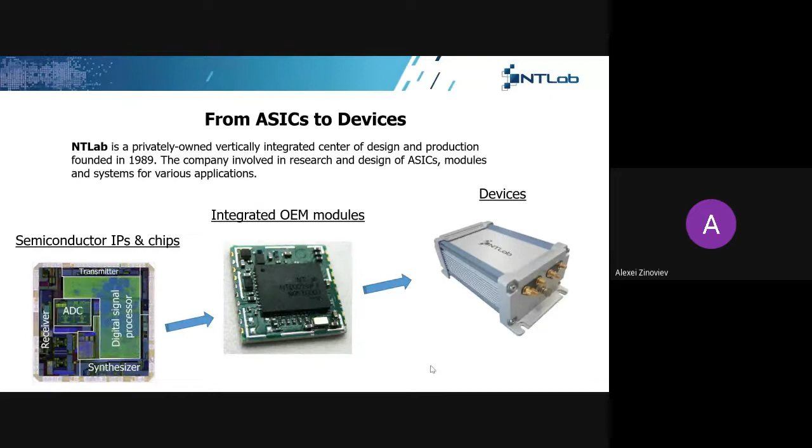NTLab, first of all, I would provide some facts about the history of my company. NTLab is a privately owned, vertically integrated center of design and production, founded in 1989. We produce ASICs, modules, and systems for various applications, and also IP components and chips related to GNSS applications.

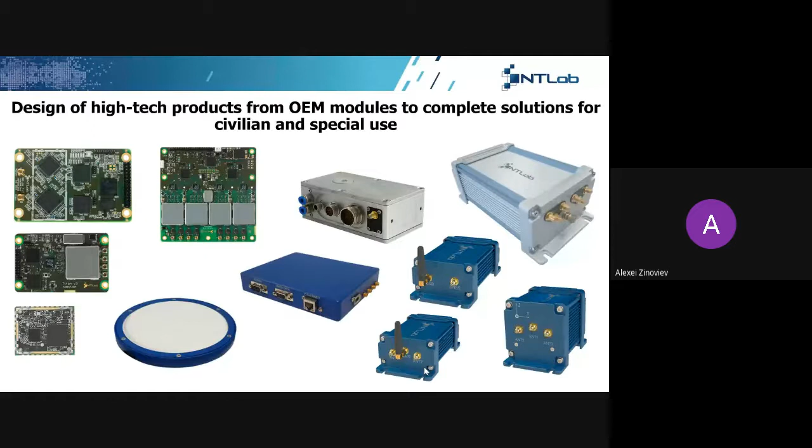This slide includes a photo of some of our products. These are OEM boards, integrated devices that include inertial sensors inside. Also, here the receiver that can play a role of the reference station is presented. It is an assembled device that includes a GNSS board inside, which is capable of tracking all current GNSS signals.

Also, it is our intention to propose co-development, licensing, and joint manufacturing in accordance with the Make in India concept. We are looking for cooperation, and we offer navigation equipment for high precision multi-system, multi-band GNSS receivers with PPP and RTK capabilities. So we are focused on high precision GNSS applications.

Also, it is very important for us to establish good contacts with universities in India. We cooperate with University of Burdwan, Jain, Marwadi, and the National Institute of Technology.

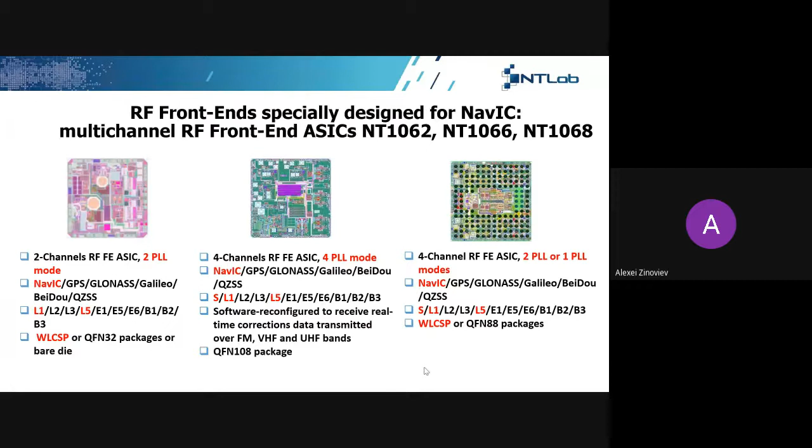In order to compute position, it is required to process samples which are generated by these RF frontends. So it is a transformation from analog to digital signals.

Also, this is our digital signal processing chip, which is capable of supporting many GNSS systems and signals. This 1058 chip is capable of supporting NavIC, GPS, GLONASS, Galileo, Beidou satellite systems with various frequency bands.

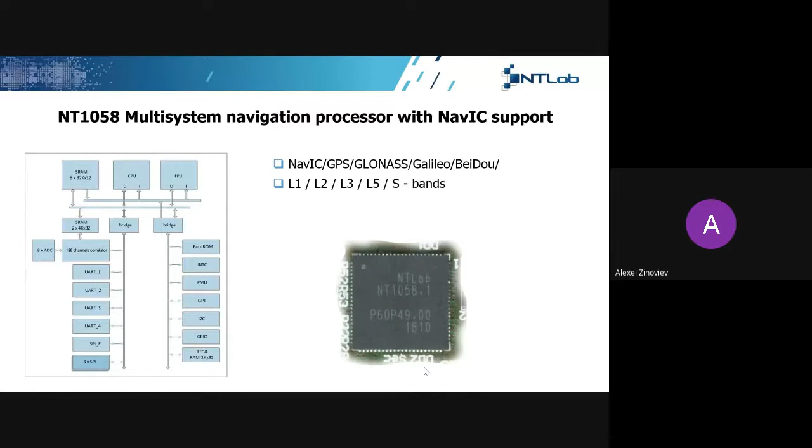This is general information about our OEM GNSS boards. All of them are multi-constellation. We are focused on supporting all available GNSS signals and systems currently available. We support multi-frequency bands, and it is quite important that we support the NavIC S-band signal in full, along with the rest of other GNSS signals.

We implement positioning modes such as usual standalone, and also support RTK and PPP modes for high accurate positioning. Measurement precision is at the best level in the class of GNSS equipment. In other words, we perform at the geodetic level of accuracy in terms of measurement precision.

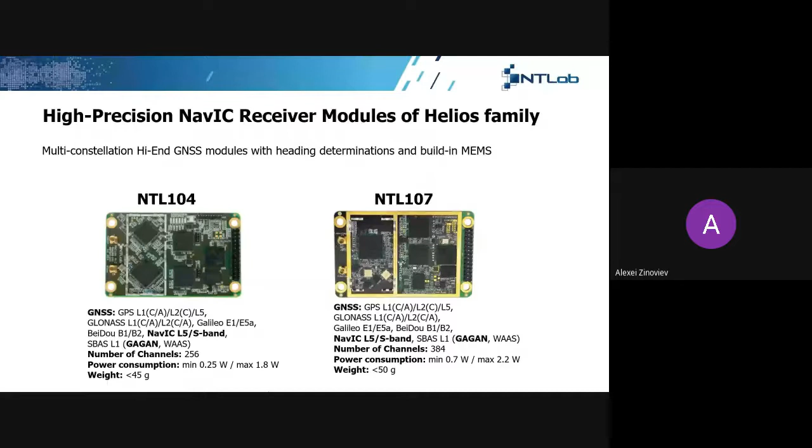It supports GPS, GLONASS multi-system, multi-frequency set of signals and systems. It contains 384 channels, and power consumption is about 2 watts.

It's important to note that we support the concept of open architecture. It means that it is feasible to upload user software into our modules, software which may be developed specifically for the given application. It is possible to get access to the raw measurements and use them for anything, including the user's own algorithms for high accurate positioning such as RTK, PPP, for example.

It can be considered as a platform which could be used for development of users' own applications and products, and we just provide a means for doing this task.

We support application programming interface with the Helios family. It includes FreeRTOS operating system, with a usual set of methods for communication between different tasks, such as semaphores, mutexes, queues, and similar tools. Also, we support CAN interface, USB, and others, as well as MCU access to initial measurements.

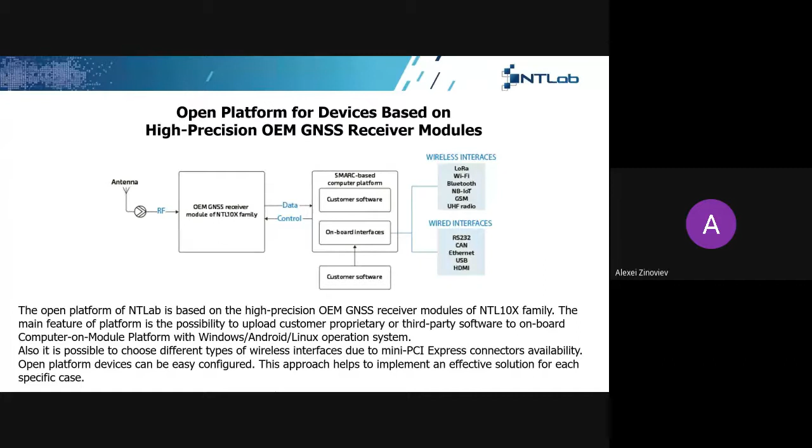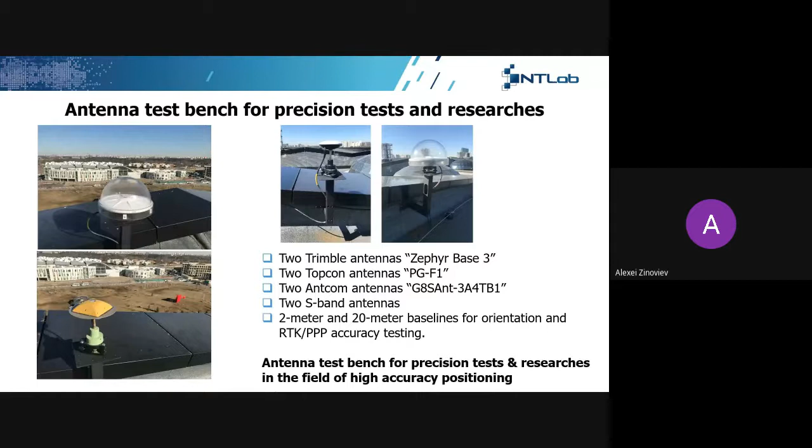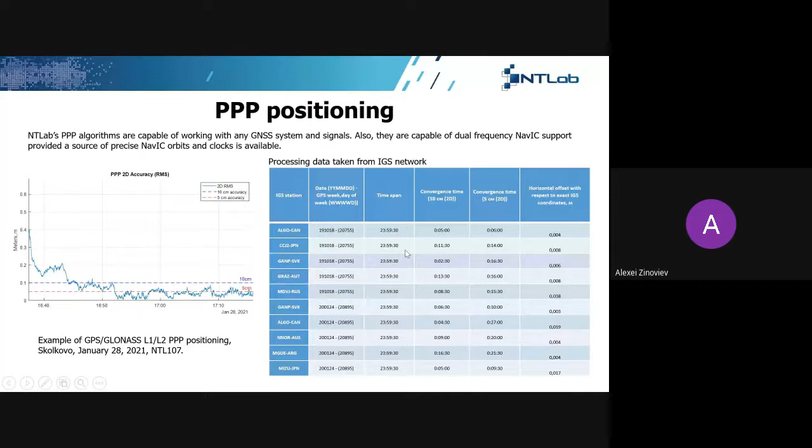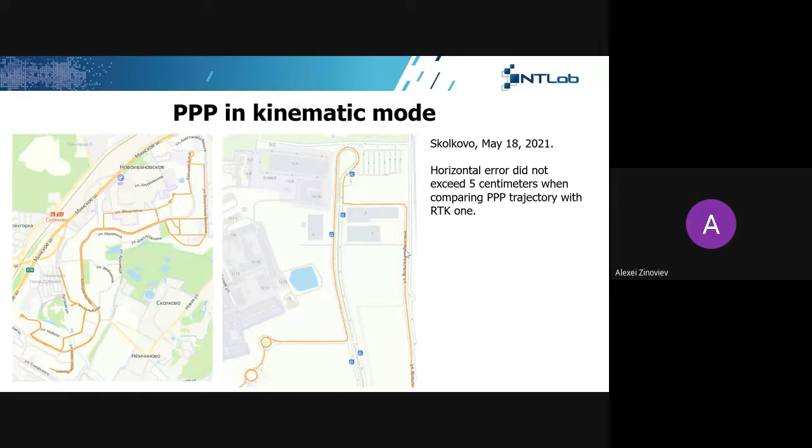So I will conclude with a summary. NTLab is a design center that provides development at any technical level, from IP components to assembled devices, in cooperation with partners. It's important to note that no black boxes are included; all key components of our devices are developed in NTLab.

NTLab GNSS receivers support NavIC L5 and S-band signal tracking in full, and raw measurements are ready for further processing. We have developed RTK and PPP algorithms which are implemented into our rover receivers, and they already support NavIC-only RTK positioning.

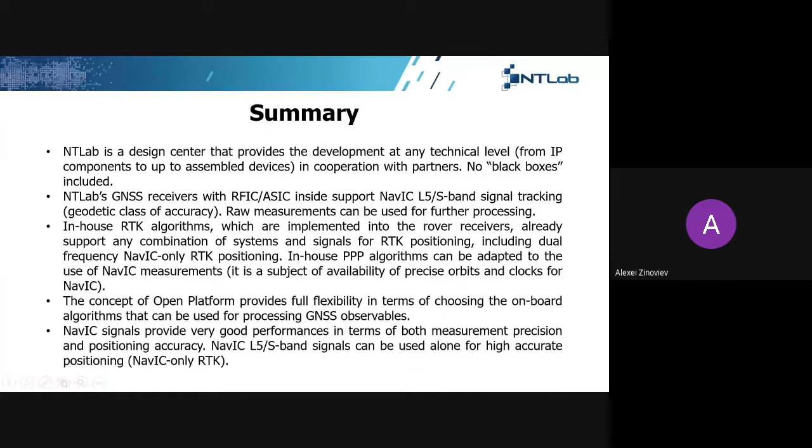In-house PPP algorithms can be adapted to use NavIC measurements. The concept of an open platform provides full flexibility in terms of choosing the onboard algorithms used for processing GNSS observables. NavIC signals provide very good performance in terms of both measurement precision and positioning accuracy. NavIC L5 and S-band signals can be used alone for high accurate positioning, for example, NavIC-only RTK.

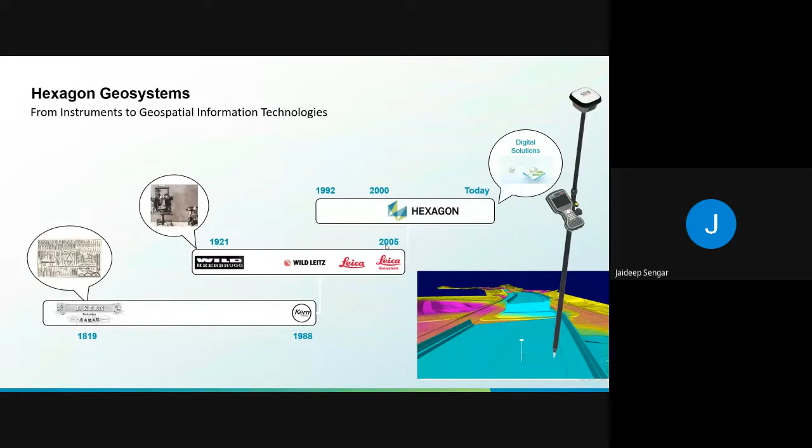Now we are coming to digital solutions. Everything you can put on your laptop or smart tablet, and you can go to the field and generate drawings, data, everything you can do on the field itself. So today I am going to present a solution on GNSS.

In GNSS we have many things to show you; out of that, I will try to capture a few things for you. The journey for GNSS in this organization started in 1984, with the first GPS receiver that could track GPS signals. The time for centimeter positioning took somewhere from 4 hours to 12 hours. The journey starts from here, and right now we are taking less than 4 seconds to give you a position.

Starting from the heavy system, which was very bulky, giving you the data, we moved into a sensor where we measured the data within an hour, and then down to minutes for centimeter level data. Then we developed new technology where we could track GPS and GLONASS signals, right? Then we developed technology in 2016 and came up with a sensor which can track multiple frequencies as well as the multiple constellations currently available.

For example, GPS L1, L2, L5, and GLONASS, Galileo, BeiDou. And right now we are also able to track NavIC signals. Then the company came up with a new sensor called the true tilt sensor. It is the first tilt sensor which is calibration-free and immune to magnetic disturbance.

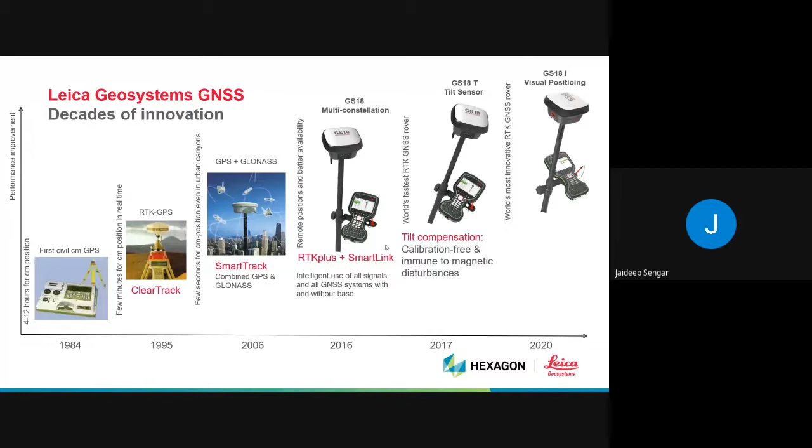Last year we released a new sensor called GS18 I. We put a camera into the sensor so that you can capture images on the field, and later on from the images you can derive the point cloud for better understanding.

Let me explain the technology we are doing right now. We are giving a future-proof GNSS technology. Right now you can measure GPS, GLONASS, Galileo, BeiDou. Apart from that, for example, HAS signal for Galileo E6 is not yet available for civilian use, but our system is ready and compatible for the E6 signal. So once the signal is available in 2023, you won't need to replace the complete hardware. You just need to put a key, an authentication key, to track the E6 signal. That's it. So we call this future-proof GNSS technology.

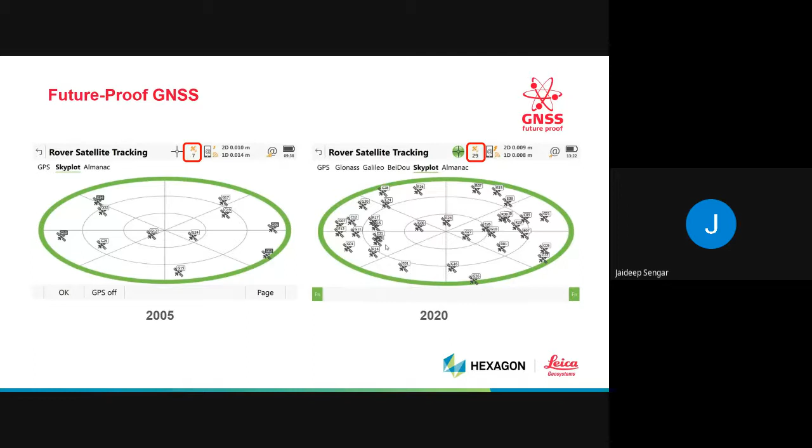Then we came up with a technology called smart check. When you go for a survey on the field, it is very important to understand whether the data you are getting is accurate or not. Because when we say we can deliver 8 plus 1 ppm accuracy, we maintain a double check on that accuracy, so that whatever we claim as a company, our customers actually get that data.

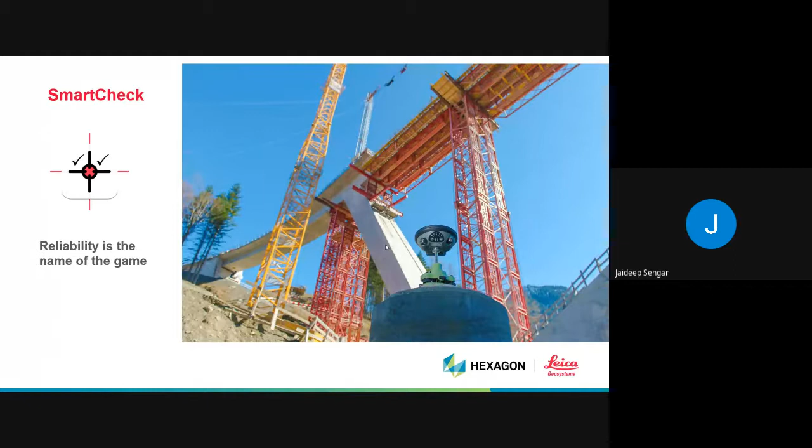Then we came up with a solution called smart link. In case you don't have internet connectivity for network correction services, or you cannot establish radio correction services, but you still need centimeter level position on the ground without any base station - because it could be too far, or it's not easy to establish a base or ground station - you can go with the smart link services, delivered by satellite, similar to Gagan. These correction parameters come from a satellite, and are processed by the sensor and software to give you centimeter level data without any base station.

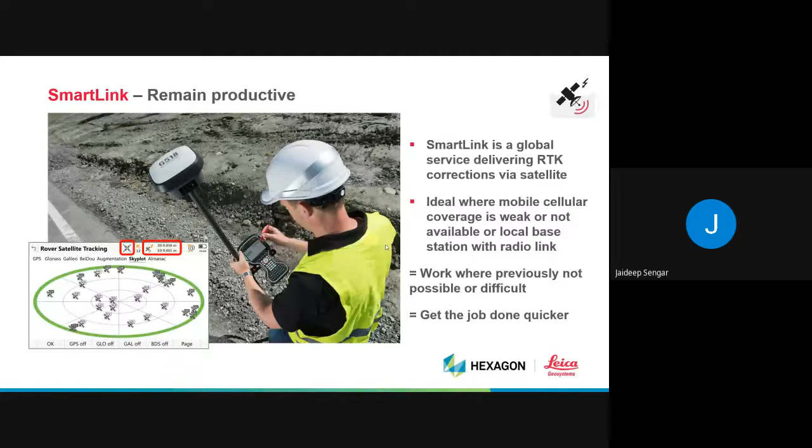Now let's look at a small video about the tilt sensor. Earlier, you needed to level the pole, then take a measurement, which was a really time-consuming exercise. With the tilt sensor, you don't need to level the pole and can continue your survey. How do we do it? We use an IMU, an inertial measurement unit, to get information about the direction and angle of the pole, which can deliver 0.01 second angular accuracy, and it is very fast - it can measure data in as little as 0.5 seconds.

Whenever you move your steps, it understands where you are moving, and it takes the data, applies the correction, and gives you the same reading you would get from a vertical pole. It is a patented technology by Leica, calibration free, immune to magnetic disturbance, and delivers the most reliable results on your screen.

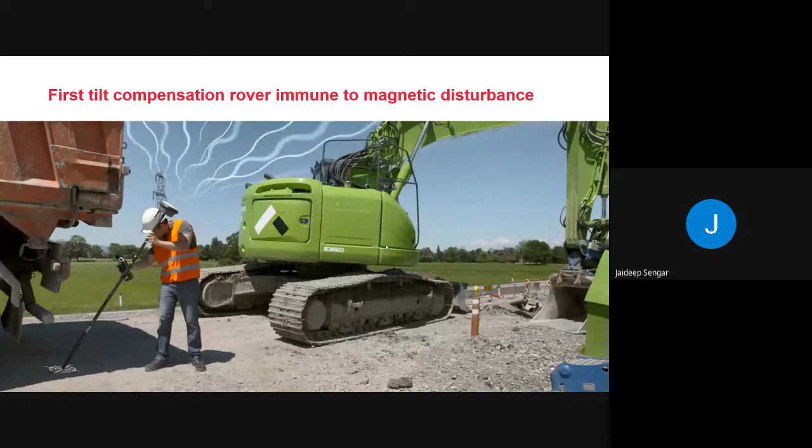The most important part of this sensor is that it can work anywhere, no matter if you are in heavy construction industry, building work, or normal topographical survey - anywhere you can go with the sensor and collect data as per your desire.

I have shown you that there's a normal sensor which can track GPS, GLONASS, Galileo, BeiDou - that's one part. Then the next sensor gives you an important feature: you do not need to level the pole, but you still get the same accuracy. So what's next? That is important.

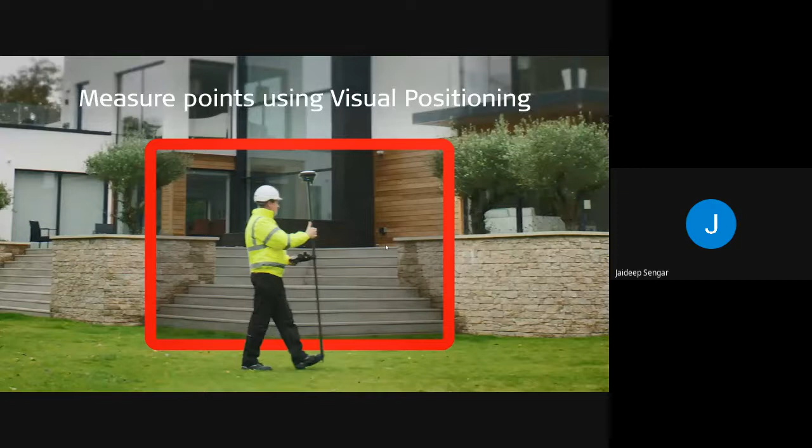The next thing is imaging. Imaging means if I'm not able to reach an area, I still have to capture it - how could I get data for that area? A camera is built into the sensor, the same GS18 sensor. Once you walk, you capture the data, and from that data you can collect the points where you want. It is safe, and you measure the data from a distance. Sometimes people don't allow you to enter premises, so this way you can mark the point and still get the data.

So how are we doing it? It's important to understand. We are doing it using a GNSS sensor, which gives you clear important parameters of the GNSS. Then we have a tilt sensor, which tells you where you are moving it, and the camera, which is capturing the image. All three are processed on a single platform and give good results and output for you.

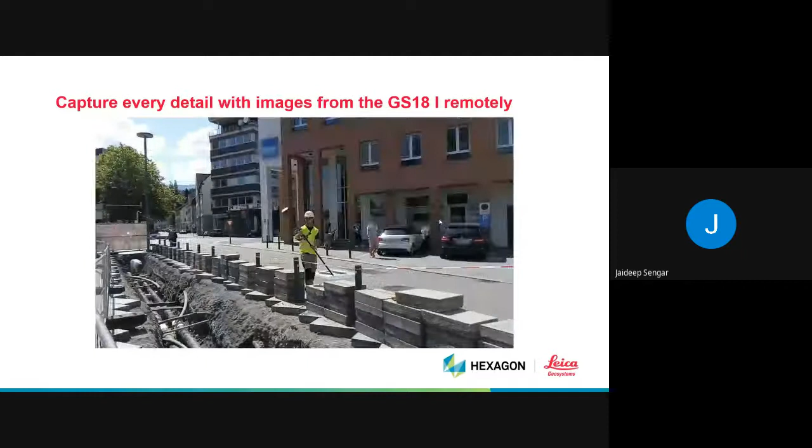So for another example, this is a pipeline, and it is important to track all the information of the pipe laid down in the area. Earlier, what happened? You had to go inside and take the data. That is a risky challenge, and some mishap can occur during the survey. So now with GS18 I, just from a safe distance, you measure all the information.

So right now you can go anywhere. A small video. This is a building, right? If I ask you to measure this coordinate of the building with a normal sensor, it is really tough. You would have to go with a scanner kind of thing and capture the details.

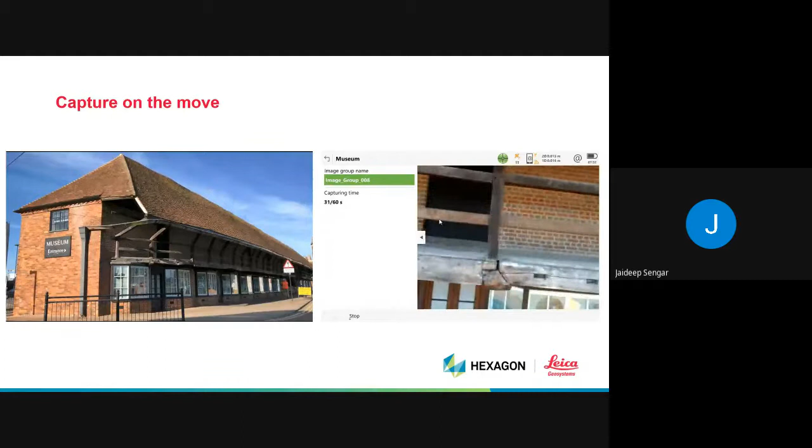But with GS18 I, a person needs to just walk. He's walking on the left side, and the data, whatever the camera is seeing, is on the right side. So from a safe distance, you walk along the building, and you can also see the capturing time. Up to 60 seconds of data you can capture and store into a group. These photographs will be captured into a group, and you can rename or give any name to the group, whatever you feel suitable. After working, once you think it's done, you press the stop button.

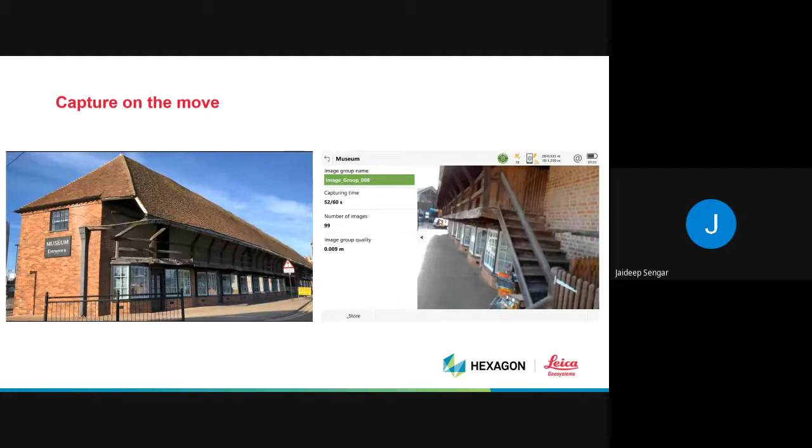Once you press the stop button, it starts merging the data. Once it merges all the images, 99 images have been merged into this group, and the average quality of the images is just 9 mm. So it's quite good accuracy on an image.

So after capturing the image, just open the image where you want to put the data, put the cursor and say measure. It is very simple to measure any point after capturing the data. This way you can mark the points on the image on the field itself.

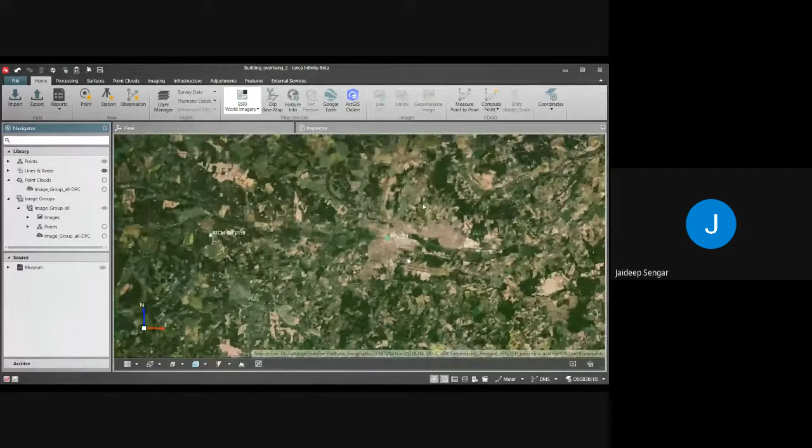Once you're done in the field, you can come back to your office. Maybe some data has been left, or your office person needs more data from the image. Import the data into software like Infinity. That is a powerful software which can handle GNSS data, TPS data, and as well as UAV data.

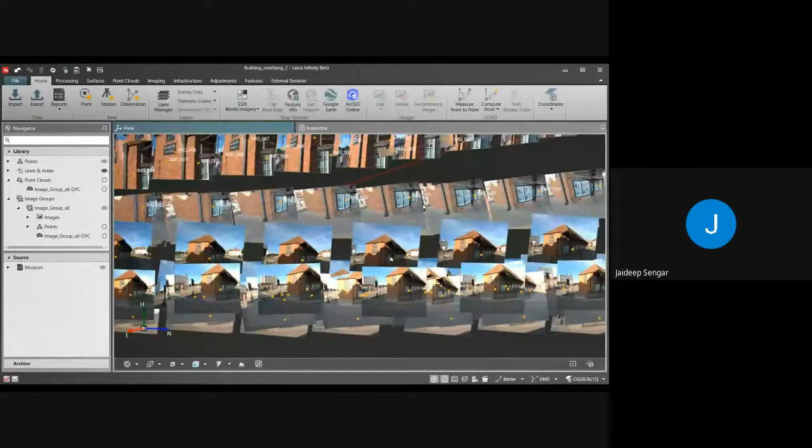So all the data can be put into a single platform, supported by OpenStreetMap and ESRI World Imagery, Google Earth. So it can tell you location information as well, where the data has been captured. If you zoom into the data more, it will tell you what kind of images have been captured and in which routine it was captured.

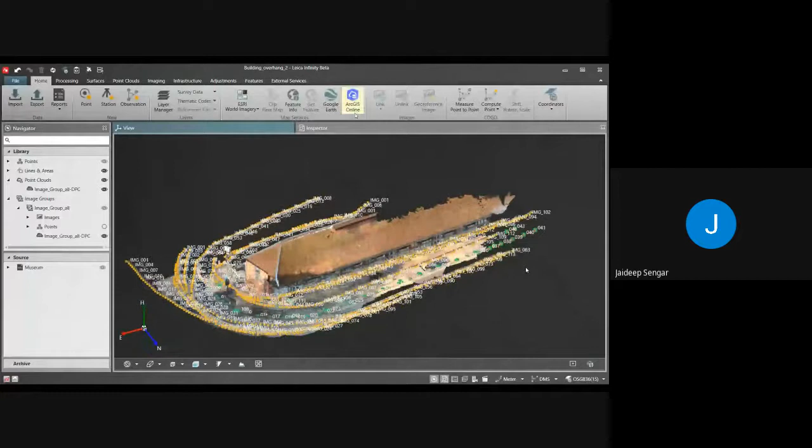So once you're satisfied with the import, you can click on the scan point option. It will generate the scan data of the image. You can turn on the images, and open just the scan. You can see it is a wonderful scan data from the images.

And now you can measure anything, whatever you wanted. You can even do redlining as well. And if you want to zoom into certain parts, you can do that.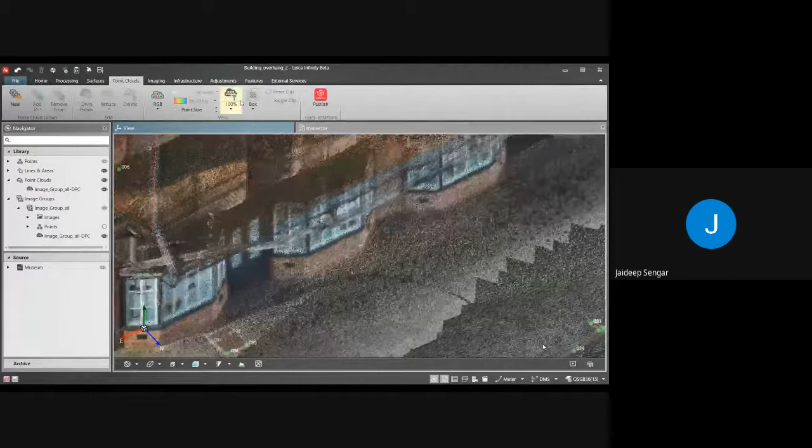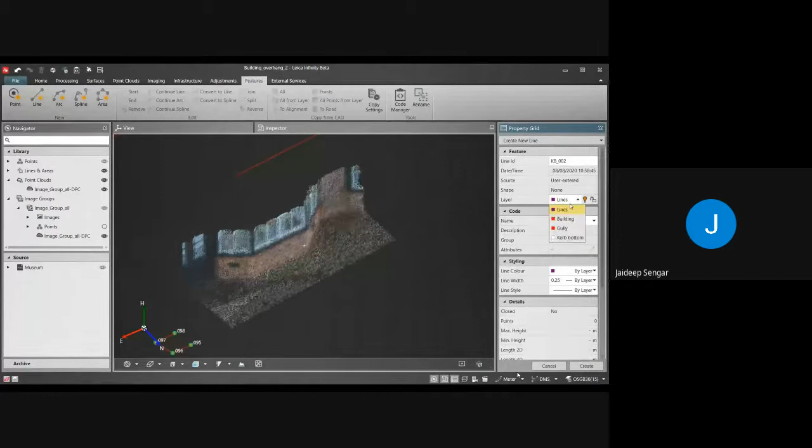So if I want to highlight some portion, I can create a box, and that portion will be highlighted for me. And because I want to do redlining or gather more information from this piece, I can highlight it and do redlining and marking of the building. Right now you can see, when I mark a building, it tells me the length of the line as well.

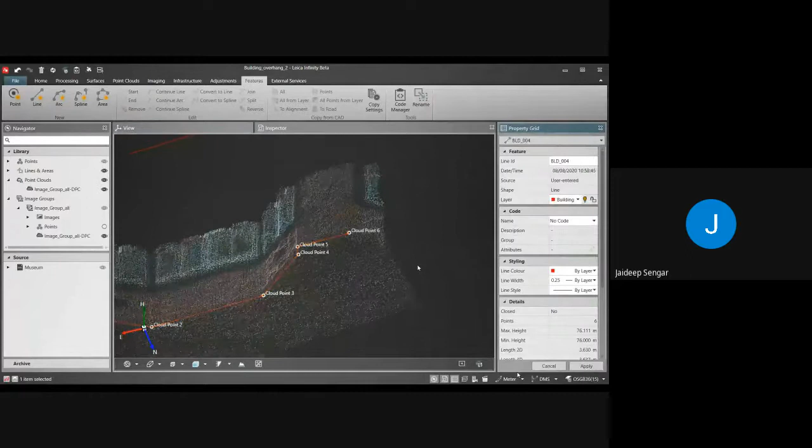That is one case where it could be a good support for municipal areas or those working in city areas, where people do not allow them to enter into premises.

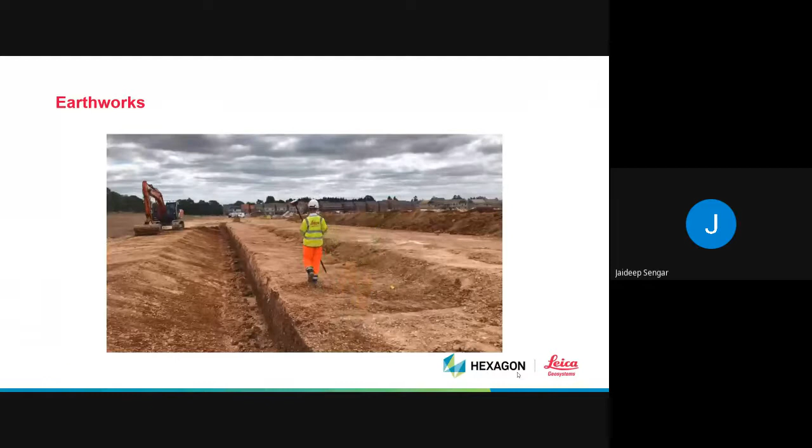This is another example for those working in construction areas. They drill something and want to create a mesh out of this area. Earlier, people would go to the total station or GNSS and capture the data every 1 meter, half meter, or 10 centimeters as per the requirement.

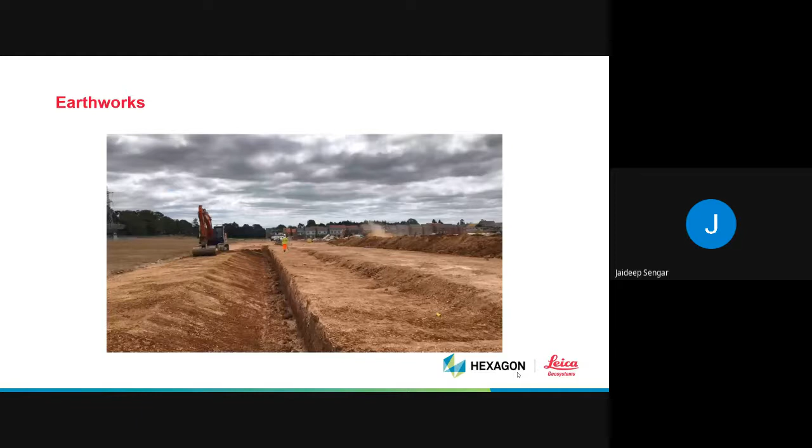But with GS18 you just move with the sensor, capture the details, put the data into software like Infinity, again the same software, and create scan data from the images.

Now we need to create a cross section or long section from the data. So we'll select the area where we want to create a cross section or long section, or if we want to do a calculation for the volume, we can do that too.

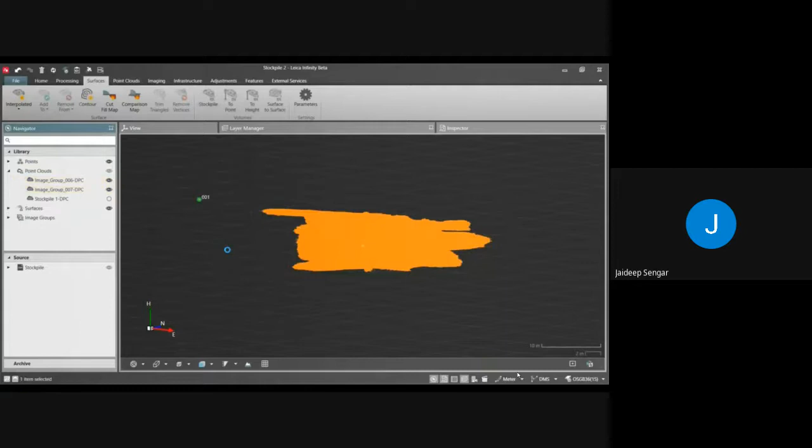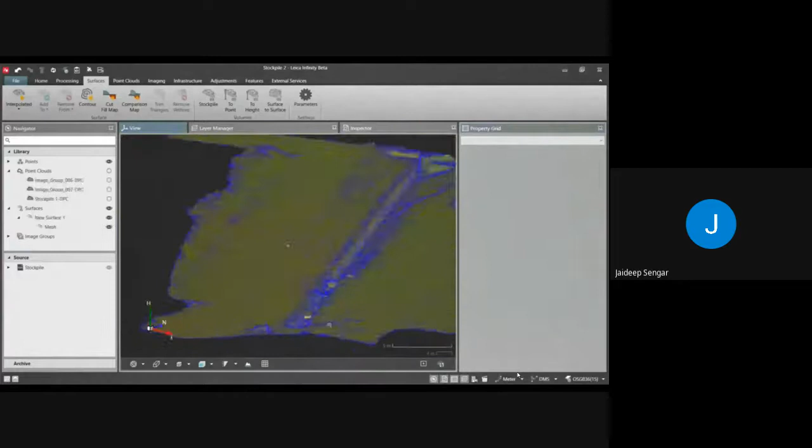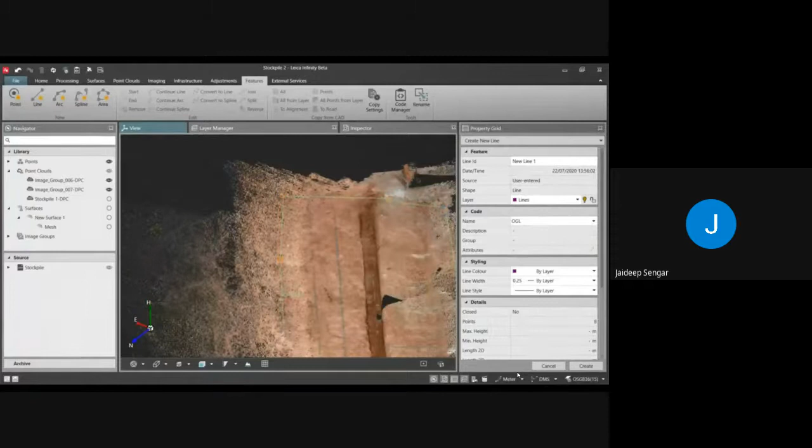Now we'll select the area. For that, I want to create cross sections. So only these points will be collected, and I can generate it.

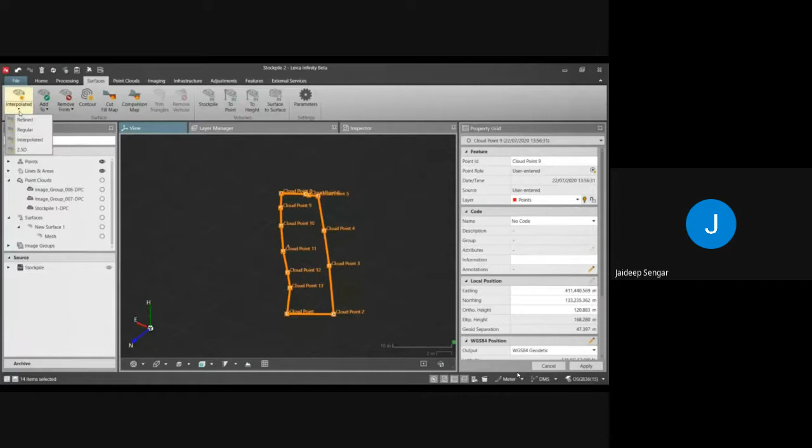Okay, so what are the advantages of having this kind of sensor? The first thing is that you are capturing 100 points in a minute rather than in hours. Earlier with GNSS, it took hours to capture 100 points, maybe sometimes a complete day. So you are saving time.

Second thing, you don't need to worry about the obstruction you are getting on the field, because you are getting the data from a safe distance. With this kind of sensor, the GS18 I, you can capture even difficult points as well. So it is a matter of safety for us. Then you can capture the scenes possible, right? So it will help you increase productivity.

So in summary, I must say GS18 I is a visual positioning technology we are offering, which is a fusion of GNSS, IMU, and the camera. It is very easy to use with survey grade accuracy. That is a very important point, that we are delivering survey grade accuracy with this kind of sensor as well. It has the same functionality that a GS18T sensor can do, plus our imaging capacity has been added to this sensor. We are offering a Captivate field software, which is a very nice software that can run on

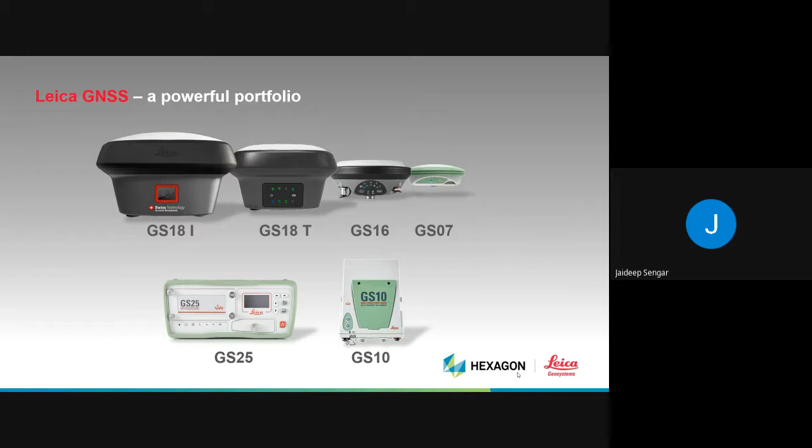To conclude, this GS18 I was the world's first GNSS smart antenna with visual positioning.

We say everybody knows the purpose is always good, but the shared purpose is always better, because both will be in a win-win situation. And that's done from my side. Thank you, sir.

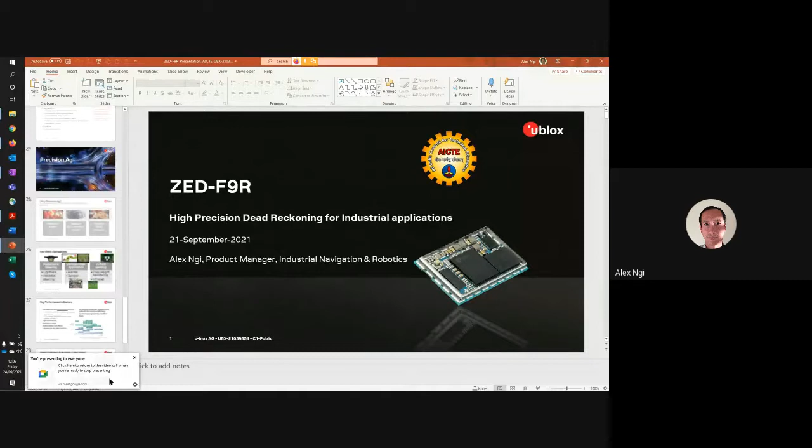Thank you for allowing us to present to you. My name is Alex Ngi. I'm the product manager for the ZED-F9R, and I represent u-blox. I think the message here for this product is that we're basically a company with a wide portfolio of modules and chips used in many applications, and we leverage the innovation of our customers to build high quality end products. We have very high quality devices often used in the automotive industry, and I think this is kind of an offshoot from there.

My presentation will not be so much about lots of performance figures and particular products. I just want to highlight two applications that may be of interest. I realize some of these are a little bit strange depending on which country you're from.

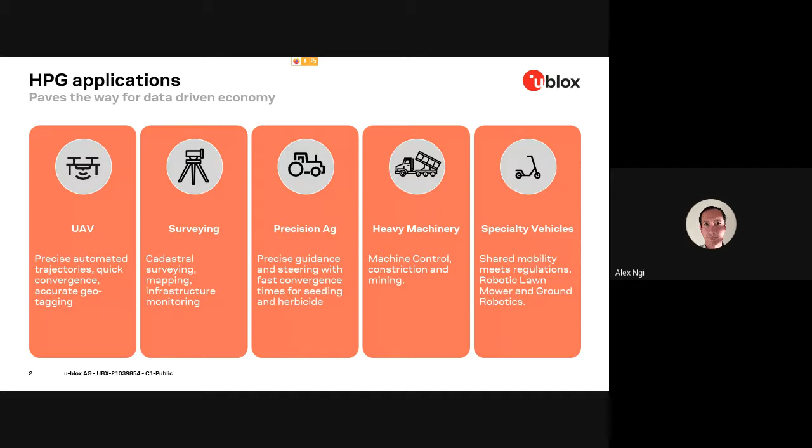From an HPG point of view, high precision GNSS, we see five different segments where we're used: drones, surveying, as our previous speaker has shown, which is also an important market segment. Then precision agriculture, which I'll talk about and how our product can help there. And of course heavy machinery for construction, and a number of specialty vehicles, which I'll also spend some time on.

The F9R product is a high precision sensor fusion product somewhat derived from the automotive side. I think the innovation that u-blox brings in this market segment is that we are targeting the higher volume markets. Compared to the previous generation of devices, we now operate with dual band receivers, operating in L1 and L2, and L5 in the coming devices.

The devices natively understand correction data directly in our modules. We have RTK algorithms implemented directly in the modules as well, and of course the 3D accelerometer and 3D gyroscopes. All this is merged with our sensor fusion algorithms to deliver the best position output for your applications.

We fine-tune our dynamic models depending on what kind of devices we're using. The latest additions have been scooters and lawnmowers, and we specifically validate our designs and fine-tune them for these applications.

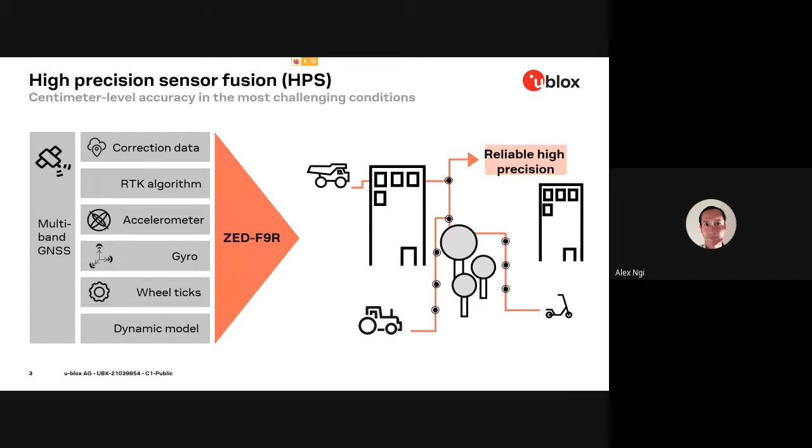The way we see our GNSS system, just as an overview, is that we focus on scalability of the solution. I'm looking for something that can operate with hundreds of thousands of units in the field and can be updated and receive corrections.

So we have this receiver that our system includes, the GNSS receiver, which has embedded RTK. We have it this way because we don't want the users or designers having to deal with the complexity—they should get the best solution from us. Our GNSS receivers are done so that the host implementations can be simple.

We maintain security, so when correction services are delivered to us, we're protecting the intellectual property of the correction service provider, and also ensuring you're getting a reliable and trusted source of corrections. We see correction services being delivered over the internet, some kind of cellular connectivity, or over satellite, and we provide the chips and modules for that as well.

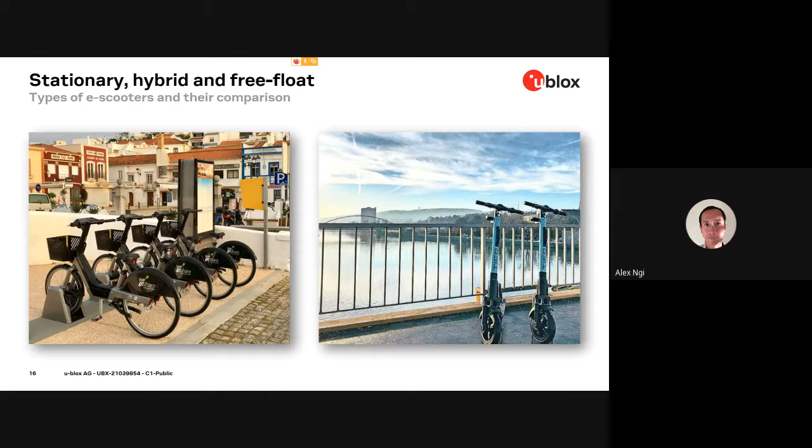You can basically park them based on city regulations, and I think that's where we try to help the operators improve their revenues. What we see is there have been lots of studies about how micromobility can work.

We view it as a very green and sustainable approach for transport, especially for the last mile. Post-COVID, we also see that more people would like to use such vehicles instead of getting onto a crowded bus. And we also see that a substantial portion of the business is on the maintenance of these and moving around these fleets, so there's opportunities for fleet managers.

So where we excel with an HPG product is that across the US, for example, in many states and cities, there are different regulations of what's allowed to use these things for. Some places want you to drive only on bike lanes, some tell you to drive on the sidewalk, some say on the road. All these regulations for a shared vehicle can be used to make it safer for everybody using such systems.

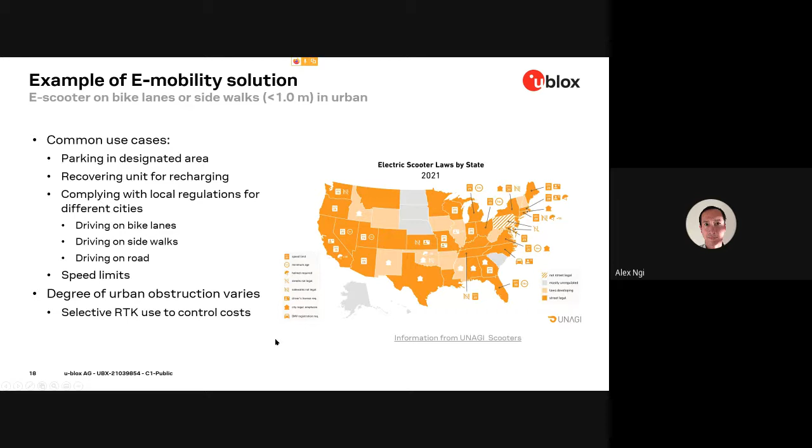A typical application we see is, here's some screenshots of Bird, who's a leading provider. On your phone, you'd get a map where the Bird scooters operate. And of course, when you're driving, you're not using the phone. So what happens is they have certain restrictions, used to enforce speed and parking policies and operations.

For example, in this small part of town in Zurich, you're only allowed to drive slowly, so the scooters are throttled to operate slowly. And in this park, you might not be able to park, but by having the maps in the system, you can drive full speed elsewhere. That's where the customer values the high accuracy of our dead reckoning solution, so they know where they are, how fast they can drive, and the system controls the user according to regulations.

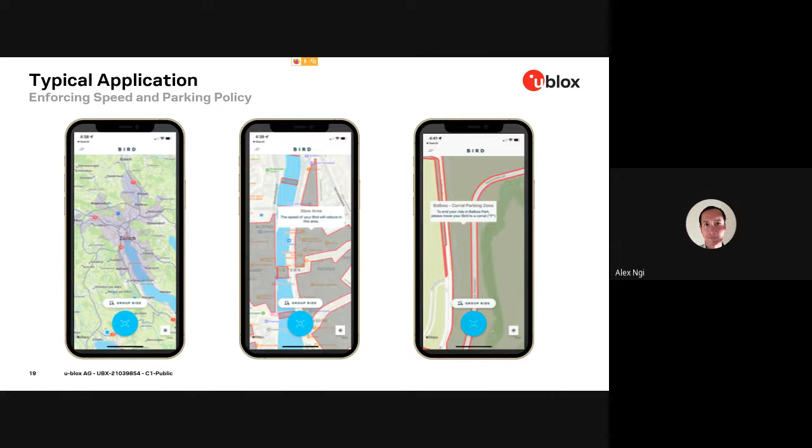So I'll show you a little bit about the accuracy here. The red is basically the F9R in scooter mode—those are the red points on the map. If you have bikes with a bike mode, which isn't what you need for a scooter, or if you don't have RTK, that's blue. So here you have three cases.

A fixed RTK solution is the best—here you can see the red is right on the dot. Then on this one, a more challenging environment with more buildings, there's a mix of fix and float solutions on the bike lane. Whereas if you don't have RTK, you're reporting positions outside the bike lanes.

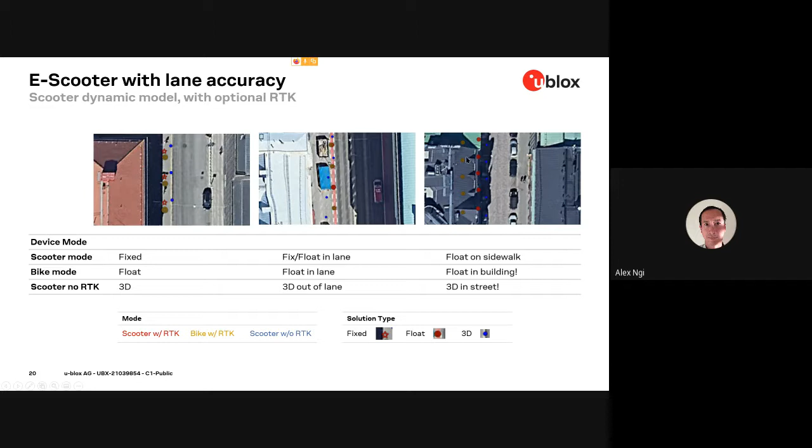So the way we help our customers, we even have a demonstration scooter that can be brought to different places so people can see how well it works. It's very simple—we have a GNSS receiver that hooks onto the hall sensors directly from the motor drive system. All we do is clean up the signal a little bit, and then use that as wheel tick. So it's very easy for customers to evaluate our product. Talk to our sales if you're interested in that type of business.

Finally, I'm not going to present anything new in terms of technology here. The main point for us is that there's a known market for precision agriculture. There are different applications where you have these very small robots moving and monitoring the fields. We all have an interest in maintaining sustainability for our planet in terms of how many seeds and pesticides we use, and there are lots of systems with assisted steering and light bars that people are building.

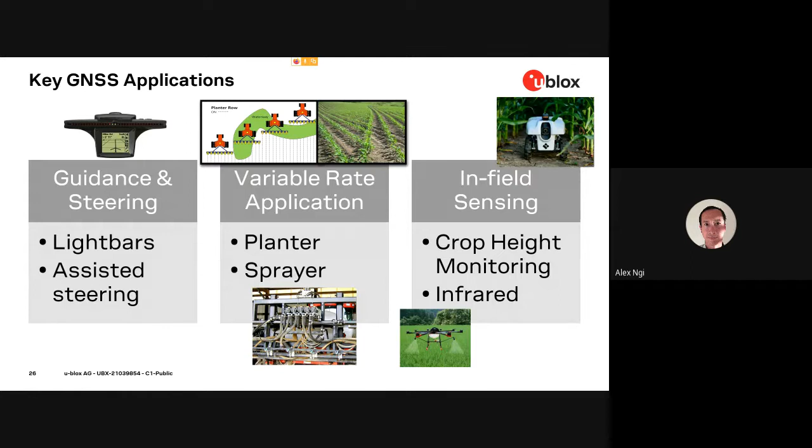I think u-blox is interesting for somebody that wants to build aftermarket products. We have a very cost competitive solution, and we see India as a large market. We've seen various reports that we need pass-to-pass accuracy of 10 to 30 centimeters with very high repeatability. This is from the GSA report on agricultural user needs, and I think our products fit very well here.

We see also that in India the farms are very small, and a lot of tractors are sold here. The very large tractors and combines being used in the US are not applicable to these small farms. So by u-blox providing a very cost competitive small product, I think there's a substantial market here for our dead reckoning technology to be used in the farms.

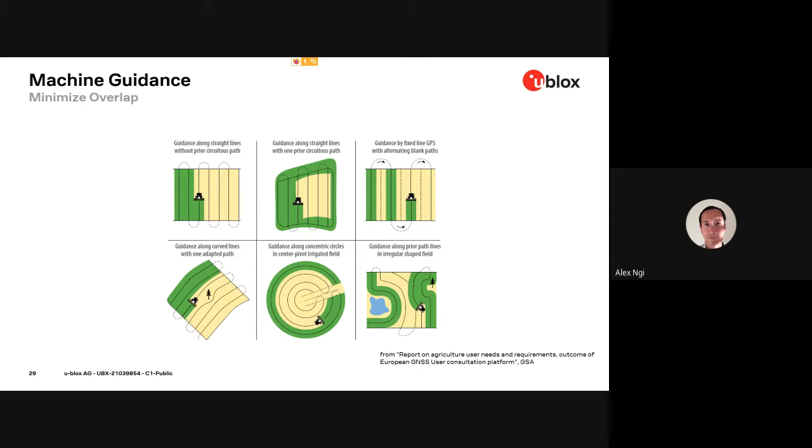When tractors drive around, you can have very little overlap and very efficient coverage of the farm field, and can reduce the overuse of pesticides and reduce the cost of seeds. It depends on the type of crops - if you have RTK technology, you can have very precise application of seeds, and you can select different correction services. Using a correction service based on PPP-RTK, which is our PointPerfect service, you can achieve that level of performance.

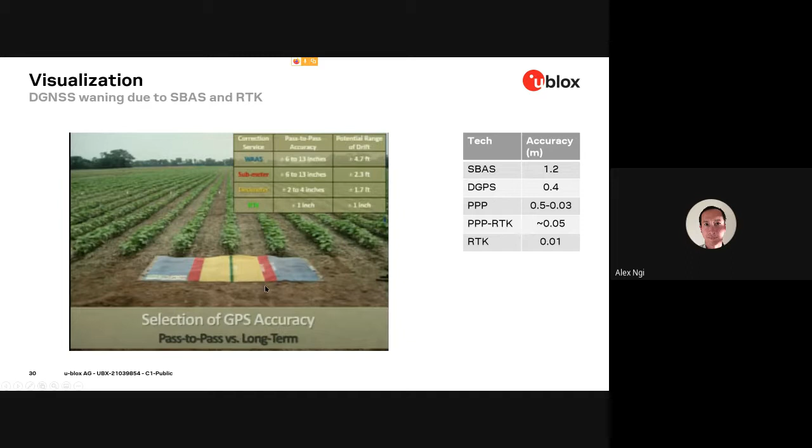In summary, the ZED-F9R is our high precision dead reckoning product. It's a multi-band GNSS receiver delivering centimeter level accuracy, a fully integrated solution for fast time to market. We have very specific dynamic models for slow moving service robots and delivery drones, and also for scooters. And we're compatible with SPARTN SSR correction services for easy and efficient implementation.

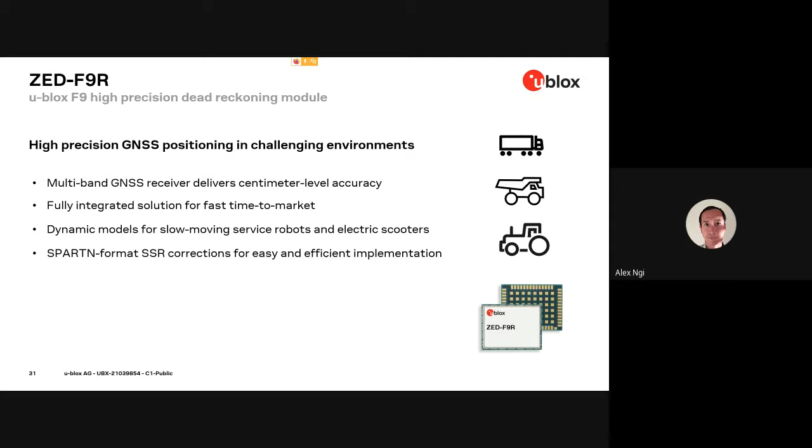Thank you very much for your time and attention. If you have any questions, you can contact Niaz Majid, and he would be happy to help you.

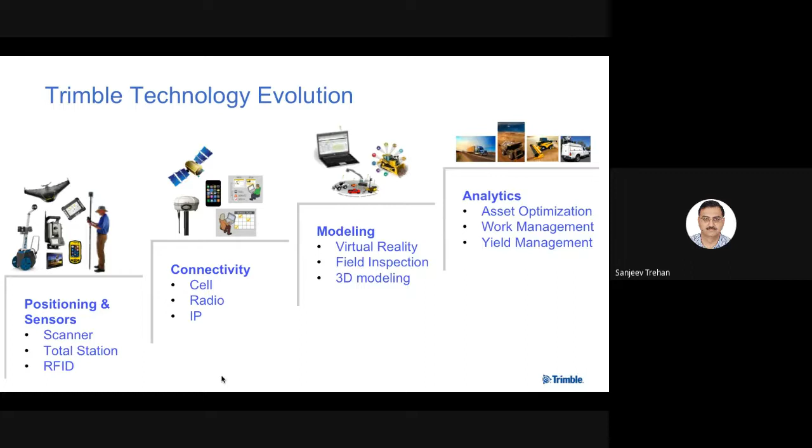Focusing on GNSS solutions, I would like to introduce some solutions that we have in the market being used in the country across different segments.

Today we're talking about miniaturization of technology. The only thing that restricts us from miniaturizing further is how much capability we can pack into a particular receiver or board. A lot of transformation has taken place over the years, and Trimble has been at the forefront of doing that.

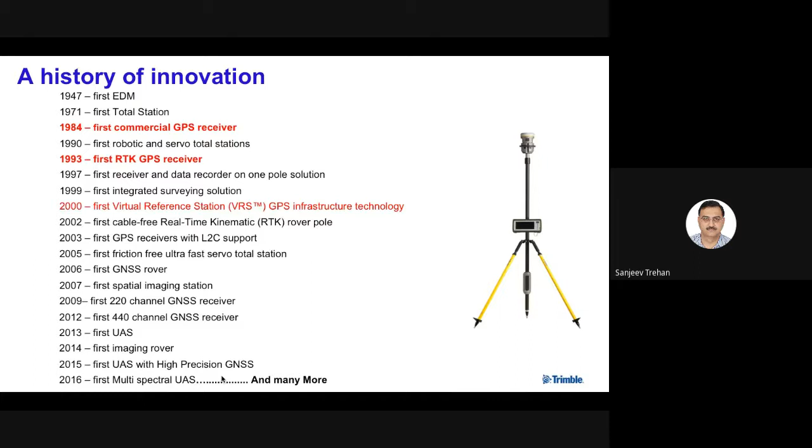There have been many firsts in terms of innovation. There's a very long history of innovation for those who are not aware of what Trimble has been doing. Apart from being among the first commercial receivers, the first RTK receiver was introduced by Trimble, and then the world changed after that. A lot of applications people use today, whether for cadastre, construction, or topographic survey, utilize RTK technology. Trimble also introduced virtual reference stations to the world, which I'll talk about a bit later. There are many firsts that Trimble is credited with, and they built the foundation for the GNSS industry worldwide, including in India.

Trimble Alloy is the backbone of a lot of geodetic programs in the country, whether it's the Earth Sciences project or CoRS networks being laid in the country. Trimble Alloy is in a very unique position as it was one of the first receivers to have complete support for L5 and S-band tracking, especially in the NavIC domain.

R8S and SP80 are workhorses. R8S is possibly the most used receiver in the country today. We have hundreds of these receivers being used by government organizations as well as private surveyors. In every corner of the country there are people utilizing these receivers, all packed with wonderful technology. I won't get into the specifics, but if there's any interest, I'll be happy to arrange an interaction with our team or personally share information with everyone.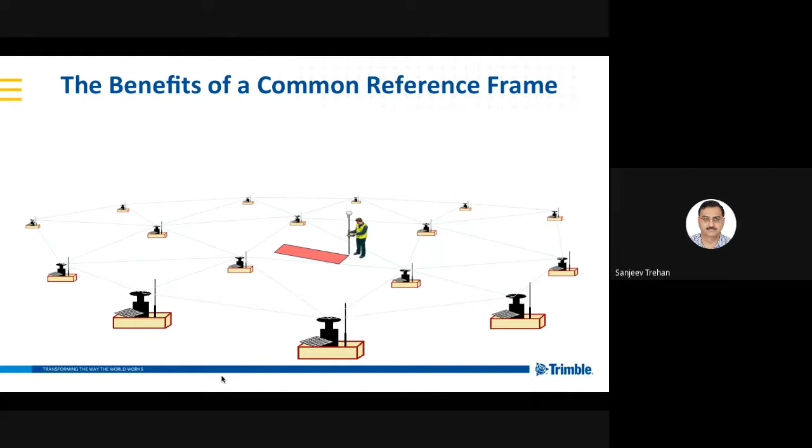Just in case people are interested in how it works: there's a network of receivers getting data into a centralized server, and the rover receiver, which has got permission, connects into the server. The server generates a position relative to a reference station next to it, and the user gets a corrected position as long as he's within the periphery of these stations. A very, very powerful tool, which is going to change the way we work.

Just to give you an example of what's been happening: we have set up a 73 CORS network in Uttar Pradesh, Uttarakhand. As I mentioned earlier, 126 are being installed in Haryana, Punjab, Rajasthan, Himachal, nearly completed. 90 are being set up in Madhya Pradesh, and we are also establishing a 60 CORS network for the high-speed rail network from Gujarat into Mumbai.

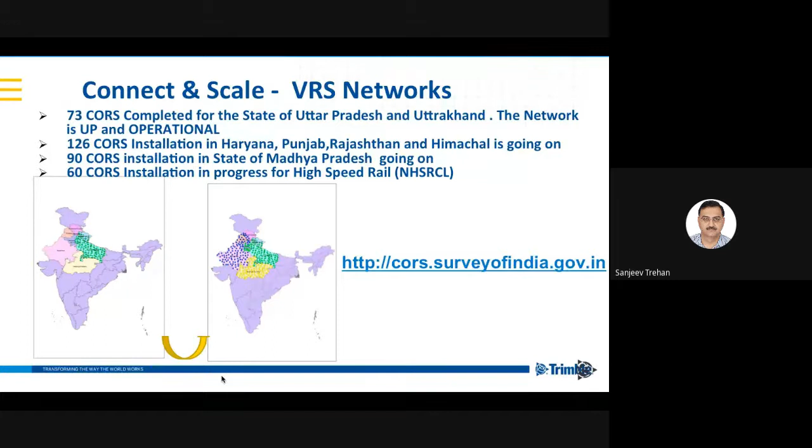Again, the predecessor for the Alloy is very much embedded out here. So for those of you who are not aware, Trimble has been a very, very rich contributor to the earthquake monitoring program in the country, as well as the tsunami warning program. If you get an opportunity, please go and take a look at the wonderful setup at IMD and Incois, where you can see real-time deformation taking place. This network has been used to predict whether a tsunami is going to occur or not, using various algorithms developed by these two facilities.

So a lot of work, a lot of effort has gone into creating the setup. A lot of customization was done for India for this project as well. So there are many possibilities that are there. If there's a problem area, it can be defined over a period of time, and a solution can be presented for those problems. As I mentioned, Alloy is the backbone.

A very, very quick look at what this series is about - a wonderful, rugged piece of equipment, extremely user-friendly, and we have hundreds of these working from the Himalayas, from the Northwest Himalayas, east to the plains of India, without any issue.

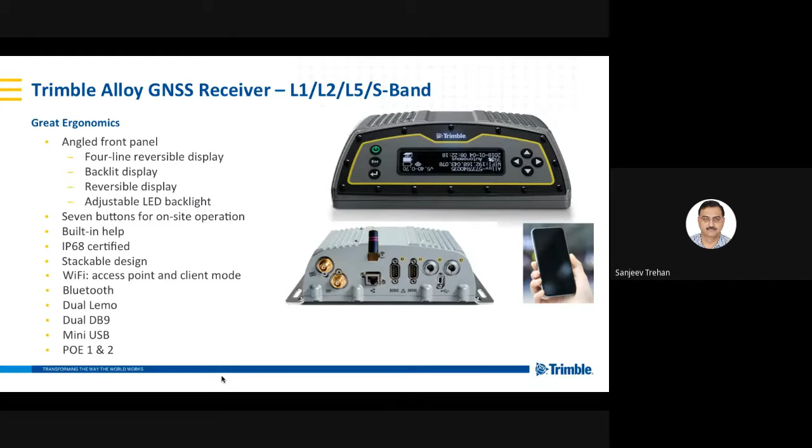We have a very robust portfolio of precision board and OEM solutions, which are getting embedded into various applications, whether it's autonomous vehicles, autonomous tractors, defense systems, or UAVs. A lot of these boards are finding their way into technology in the country and all across the world. So we have both box products, which can be retrofitted into various equipment or platforms, or board level products which can be integrated into a solution depending on the requirement.

All but two systems are L5 NavIC ready, so they support multi-constellation L1, L2, L5, and I can share more. There's a mix of both single antenna systems as well as dual antenna systems to take care of heading requirements. I can share additional information depending on who requires what, and it'll be my pleasure to do so.

I also help this particular side of the business in the region and support their activity with various customers around the country.

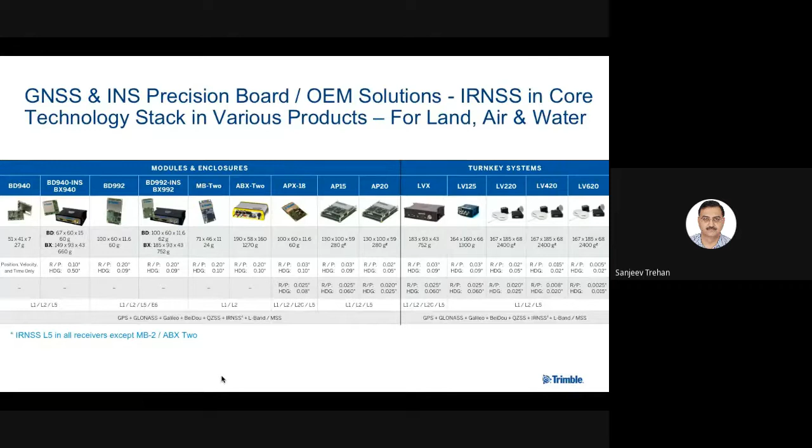Another part of this business is the Applanix solution. This is just an image of how the system looks, the box solution and the board level solution. Applanix has some core competencies, including marrying GPS and IMUs and calibrating them extremely finely. We have solutions under the Applanix brand operating in drones, mining environments, marine environments, along with UAVs, etc. Direct georeferencing is a proprietary technology that Applanix has.

Conventional GNSS receivers, when embedded into UAVs, require around 70 to 80% overlap. Applanix DG core technology allows UAVs to operate with a 30 to 40% overlap, thereby increasing the coverage of the UAV, leading to productivity, as the data set collected is smaller and faster to process. You also don't require multiple ground control points; you just need a base station and operate in RTK or PPK mode.

Wonderful piece of technology. I'll be happy to share information on the OEM side of the business with anyone interested, anyone willing to develop the solution locally. We are supporting many people under the Make in India program, where these sensors are getting embedded on various platforms. These are certain target industries where these sensors are being used.

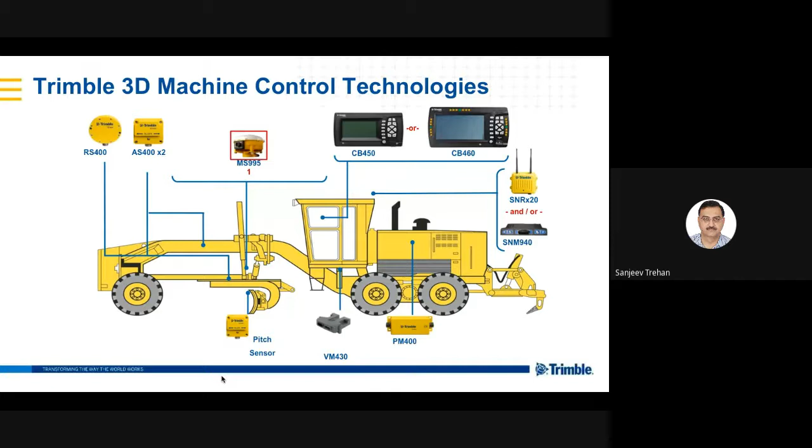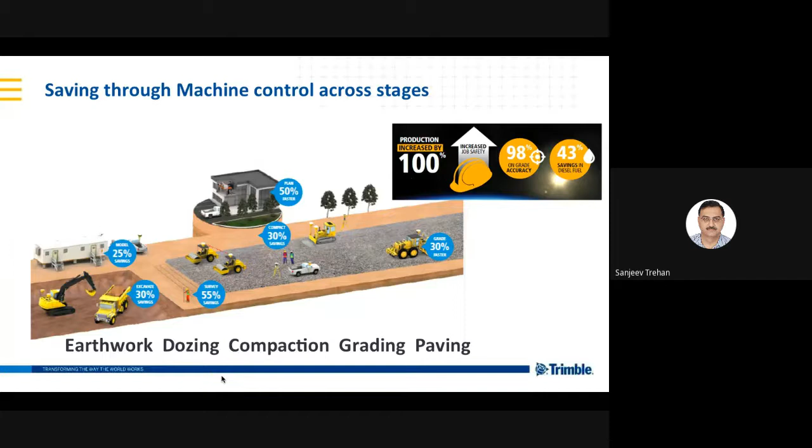Today we have multiple projects ongoing in the country where it's being deployed on rail, on highways, and on airports, where 3D machine control is adding a lot of value, working day and night. This just shows the kind of productivity achieved by using various platforms. I'll again be happy to share information with anyone who wants to know more about this aspect of the technology.

One aspect that a lot of people don't relate to at times is that GPS also presents a very robust timing solution. Today, our timing solutions are embedded as a backbone for a lot of telecommunication networks. Without getting into specifics about which service provider, our Thunderbolt solutions and OEM solutions are embedded in a lot of telephone networks. And whether it is your synchronization every time you use an ATM, there is a part of Trimble which comes into use there. So this is just an example of different ways we're adding value in the country as well.

So these are some OEM solutions. There are people creating around these boards, and the latest one I've done is down below. We just introduced an L1, L5 GNSS timing module which is extremely small. We've got rave reviews on a worldwide basis, and hopefully this will be doing pretty well in the country as well.

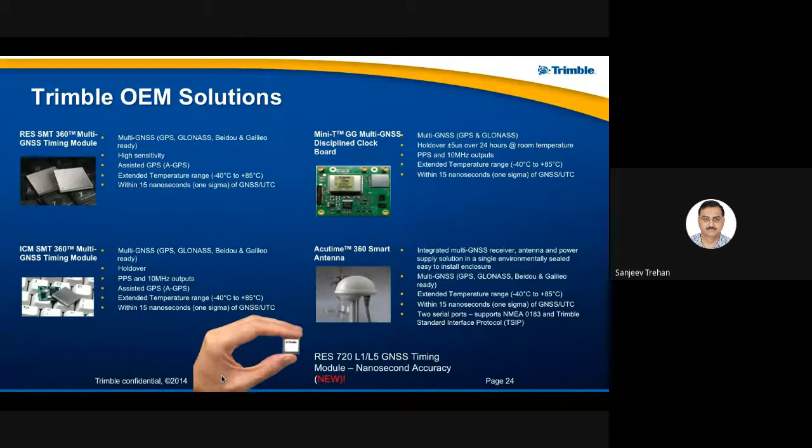And now I've talked about certain receivers very quickly. Certain core technology I'll just talk about and share some additional information on a one-to-one basis. As I mentioned, R12 is the most advanced GPS receiver in the market, extremely reliable. There are certain core technologies packed into the receiver. There's one technology called Trimble ProPoint, Trimble Tip. Apart from that, there is RTX, xFill, HD GNSS, etc. I won't go through all of them since time is of the essence. I'll just talk about a few of them.

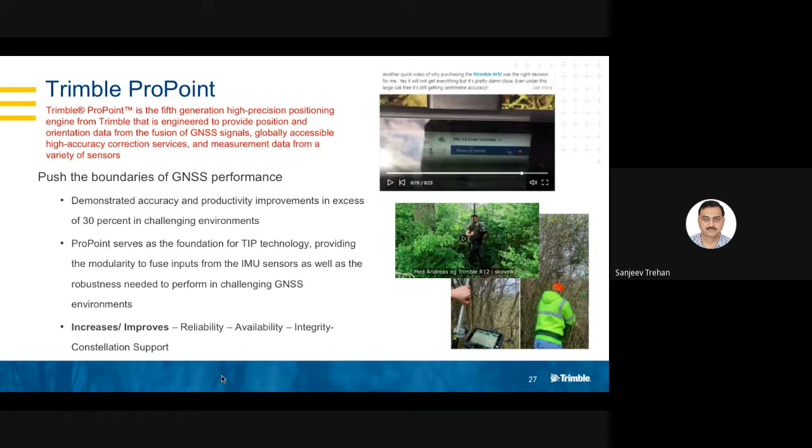Trimble ProPoint is a 5th generation high-precision positioning engine, engineered to provide position and orientation data from fusion of GNSS signals, high accuracy correction services, and measurement data from a variety of sensors. Ultimately, it increases reliability, availability, integrity, and constellation support. ProPoint allows us to take NavIC into the solution as well, and allows you to operate in very, very tough environments. I have personally seen the operation, and there is extreme productivity enhancement since you are able to operate in very difficult terrain and environment using this technology. Under trees, in urban canyons, in mountainous terrain, etc., the productivity is tremendous.

Sanjeev ji, yes sir, I would request you to please try to conclude.

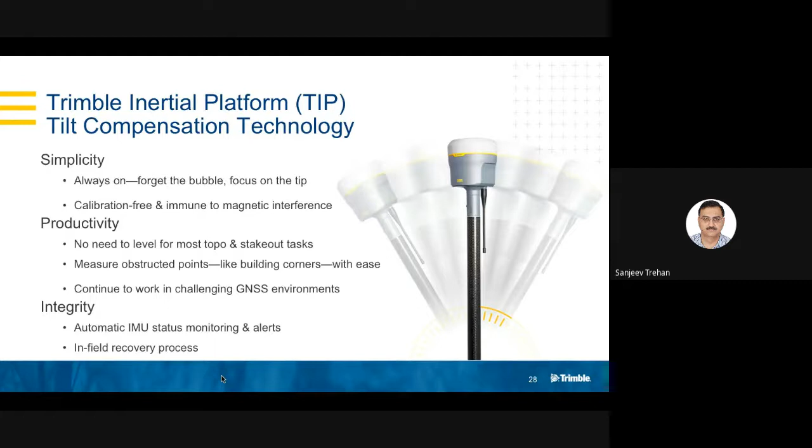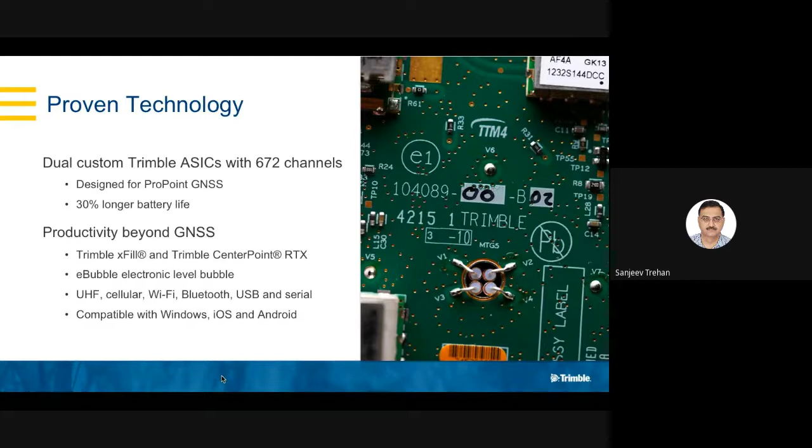Oh okay sir, so very quickly, a couple of slides, then I'll skip. Trimble tip is the tilt compensation technology, where you can operate in inclined mode. I guess it's self-explanatory, I will not spend too much time. This just talks about what the basic backbone of the technology is all about - a Trimble ASIC with 672 channels, which has got built in, packed with a lot of technology.

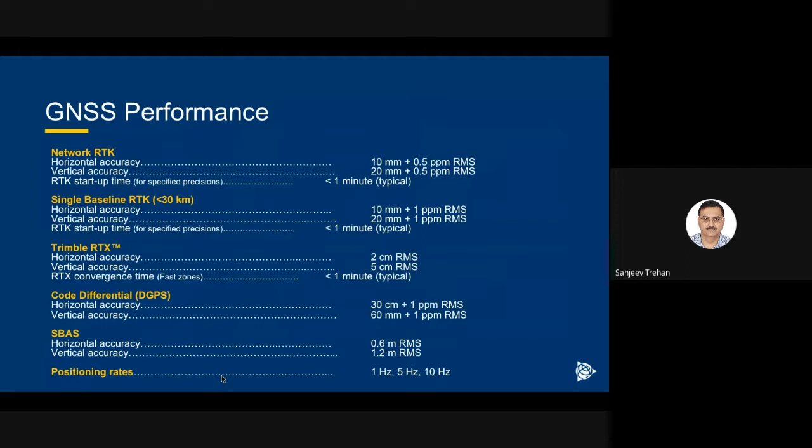Now, very quickly, Catalyst technology is what I mentioned earlier. It's a software-based GPS receiver, uses Android or iOS, uses Bluetooth to connect between the antenna and your phone or tablet. Very lightweight, a subscription-based service, and highly accurate, as you can see, as accurate as a conventional GPS receiver.

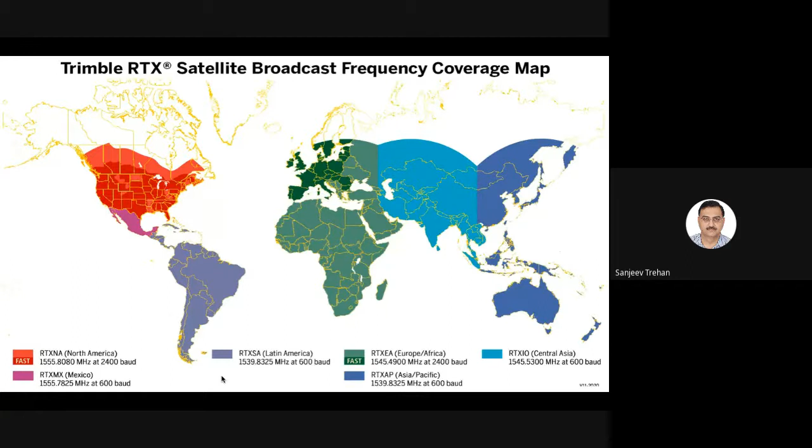Another aspect is PPP - Trimble CenterPoint is gaining traction across the world. A lot of autonomous vehicle manufacturers have started using it. This is a broadcast coverage map of the area. We are providing a 2-centimeter service in North America and parts of Europe. In India, we have at best around a 5-centimeter service, but things may change down the road.

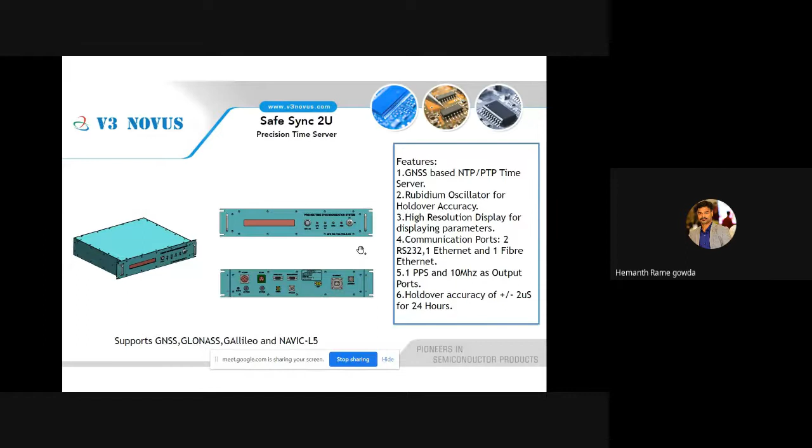This particular equipment has a 2U form factor. Features include a precise 1 PPS output and 10 megahertz output, available in addition to the NTP server.

This is an NTP server where many clients can be connected. All our products are MIL qualified - we've qualified MIL 461F on the EMI/EMC side, and MIL 810G on the environmental side.